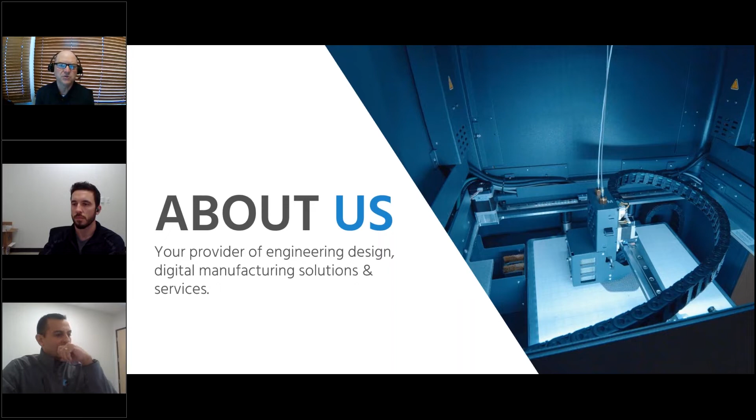For those of you attending a Hawk Ridge webinar for the very first time, I wanted to share a little bit about our organization. We were founded in 1996. We provide design, engineering, and digital manufacturing solution services—that's the primary focus of our business. As you can see here, we have an extensive product portfolio that covers four key categories: design, manage, simulate, and manufacture. Those are the four key areas companies typically go through as they develop a product and bring it through the product life cycle.

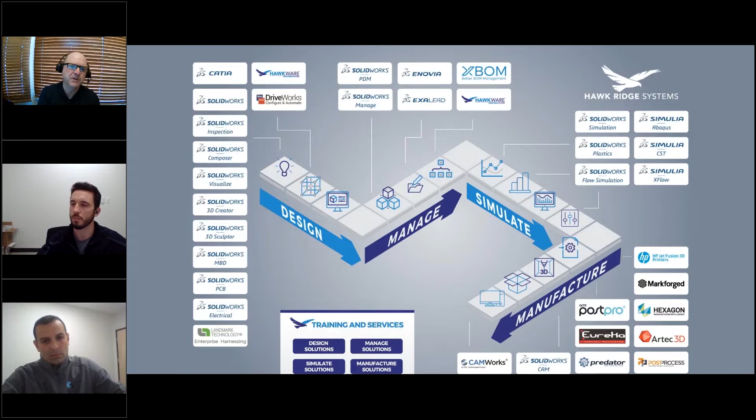Another key area I want to mention is the training services aspect of our business. We believe in supporting what we sell. Here at Hawk Ridge, we work with our customers to assure that they are successful all the way from pre-sales and identifying the best solutions for their specific need, as well as installing or implementing the total solution, and training and supporting them for many years to come. That gives you a brief overview of our product portfolio.

Amongst these offices, we have 7 different locations that have digital manufacturing labs, where we provide live demonstrations for various 3D printing equipment and post-processing equipment as well.

Hello everybody, thank you so much for the opportunity and for the interest in our company. To give you an idea of how we started, our company really realized that 3D printed parts essentially are not ready for use out of the printer — they're still unfinished when they're done. So to us, this presented a huge opportunity to break down a barrier that continues to prevent many of you from transitioning to production for additive manufacturing at scale, or in general, from allowing some of these 3D printed parts to be considered end-use products.

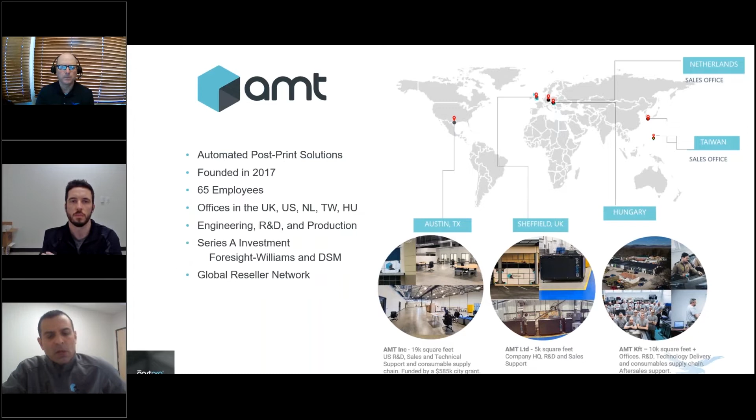With that, what I'd like to do is focus on the importance of post-processing, because many of you may be wondering what this is all about. If we can go to the next slide — I want to highlight that, depending on the application across multiple industries, the impact of post-processing on the ultimate cost of a 3D printed part can vary significantly.

I've been fortunate to be part of this industry since the very beginning, during my freshman year at Virginia Tech. My background is material science, and my experience with 3D printing started just researching materials and trying to understand the weaknesses of why they were being used only for prototyping. Why couldn't we use them as end-use parts? As the technologies improved and matured, I was able to be part of the transition from rapid prototyping to true additive manufacturing. As an industry started to qualify additive manufacturing for true production and scale it to production, what I've learned is that one of the most significant barriers to the transition to production is the cost of post-processing.

The cost of a 3D printed part comes from the preprint, which is the cost of software and the knowledge, know-how to prepare a build or design a part for 3D printing. Then you have the print, the material, and the post-processing. After you try to qualify an application for production and all the stars align on software, printer cost, throughput, material properties, and all the process settings and conditioning, so that you can have something robust and repeatable enough to go into production, you come to find out that there's still economies of scale that don't make sense. One of the reasons is because post-processing is so expensive.

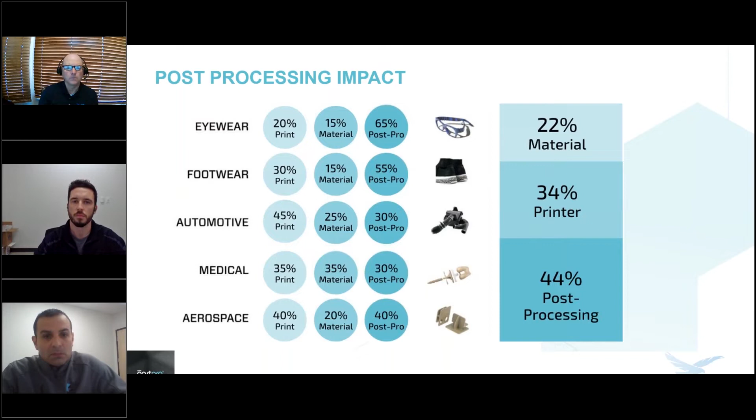I hope that as we move into describing all these products in the next slide, Brad and I will do a good job, and feel free to ask any questions from any of these industries - consumer, automotive, or any others. If you have a specific one, we've had a lot of experience looking at many of your applications. There's no agenda, but we're free to answer any questions. It's Brad - I'm not sure if you want to take it from here and walk us through the product line from AMT. Yeah, absolutely, thank you.

These are our products that we currently offer - chemical vapor smoothing, and also depowdering. As we approached the post-processing challenge and put together our plan of attack, we started with vapor smoothing first. This is the flagship machine we started with, the PostPro 3D, the machine on the right, the larger system there. That is our flagship machine that we've had out in the market for several years now.

The reason why we started here was, one, because of what Luis said - we built this off of a license from the university and brought it into an industrial setting. But we also saw the huge benefits of improving the aesthetics, the sealed surfaces, and improved mechanics, realizing that when we attack this, we can lower post-processing cost pretty significantly with this automated solution. Throughout the years of learning this system, we also realized we have the ability to scale this process up and or down. That gave us the PostPro 3D Mini, the smaller unit to the left, built around the exact same technology of using chemical vapor to smooth the surface of parts.

So how these actually work is we load your thermoplastic polymer parts, printed off of any kind of platform, into the system. What we do is introduce a chemical vapor onto the surface of your parts, and we ensure condensation and create a flow state on the very outside of that surface. So we're micro melting the surface of the part, creating that flow to remove the porosity, the layer lines, and that rough feel that you normally get, particularly off of powdered parts. You get that granular sand finish, or with FDM parts, you can get the coarse stepping and layer lines just from the technology itself. What we do with that flow state is remove all of those blemishes.

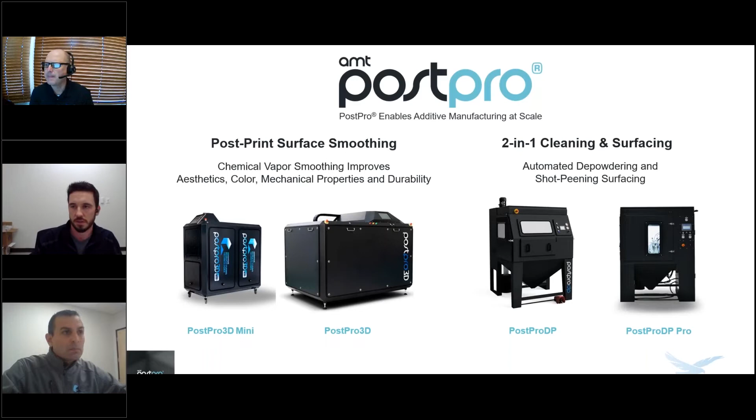Great, awesome. So these are the products. We can dive a little deeper into each of these if you wouldn't mind hitting the next slide.

When it comes to our Post Pro Vapor Smoothing, we separated it into three pillars we like to talk about. I'd like to start with the fact that we wanted to make sure this technology is easy to adopt—meaning we have a safe and affordable solution to allow users and industries to scale up with this process and their production, because now we've reduced post-processing time. Customers can now use this technology to hit higher volumes with better ability on the part. We also want to make sure we meet strict health, safety, and environmental standards so this technology can be located anywhere, even in the strict state of California.

It's also a near plug-and-play type of install. We wanted to make sure that when a new user brings this technology in as a true solution to automate their post-processing, they're up and running within the same day.

So there's various pieces of equipment involved, but it really is a plug and play solution. We do a training within a day, and we have our first run within a few hours to get that system going. So that's another big focus on it.

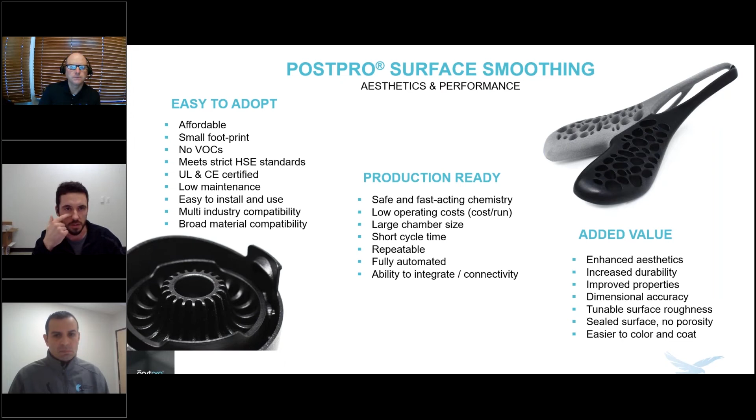So this here is color printed parts off the HP 580, as you can see. And the first thing you'll notice is the incredibly improved aesthetics of this part. And now the color actually pops, right?

The reason being, remember in the beginning when I was saying we create this flow state on the surface? The part on the left, the raw part, when it's being fused, the colored parts are surrounded by white powder, and this is the same with SLS or anything like that. There's always this partially fused layer of powder, and that's what we're focusing on. Once we liquefy that and start flowing that material, bringing our peaks down into our valleys and leveling out that surface, you turn it into what you see on the right - very smooth and sealed surface, bringing that partially fused powder into the surface.

And that's how we now reveal the true color of that 580's color capability, bringing you closer and closer to that color you desire, whether it's color coding or particular applications that need very color specific information on them. This was probably the most

eye-opening, literally, and dramatic effect that we've had with our customers when we show them the vapor smooth parts. I mean, we were the exact same way. We happen to have a customer of ours that has your technology, and I went to their facility and saw that, and I was absolutely blown away on how vivid the colors were that we were never able to get out of the HP 580 without going through this process.

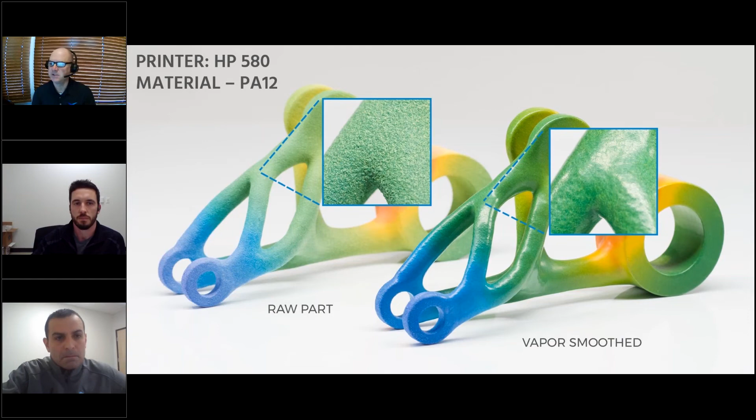Maybe we can move on and show some of those other images that we have, because some people definitely want to see some of the Onyx material as well.

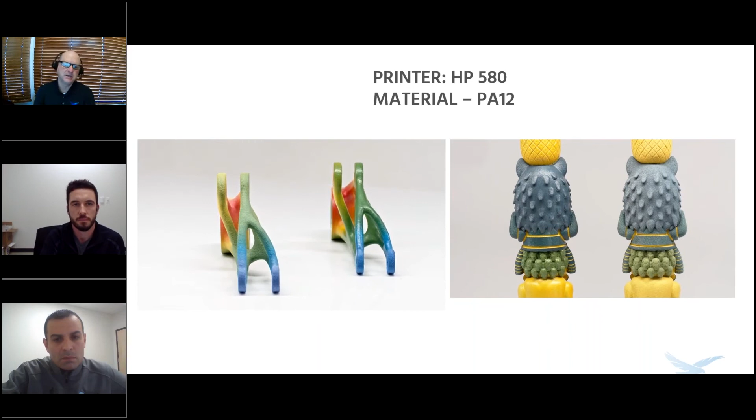I think this one's again pretty impactful, right? I mean, the same part that we saw earlier, but as we spin it around here, you can just see a significant change in the texture and the vividness of the color as well.

So I'll pass it back to you, Brad. Yeah, thank you. And just one good thing to point out is the part on the right there has a lot of intricate detail, parts coming to sharp points.

There's fine lines of color and all of that, and you can see that we still have the ability to control a great finish. The product on the right is that smooth sealed finish.

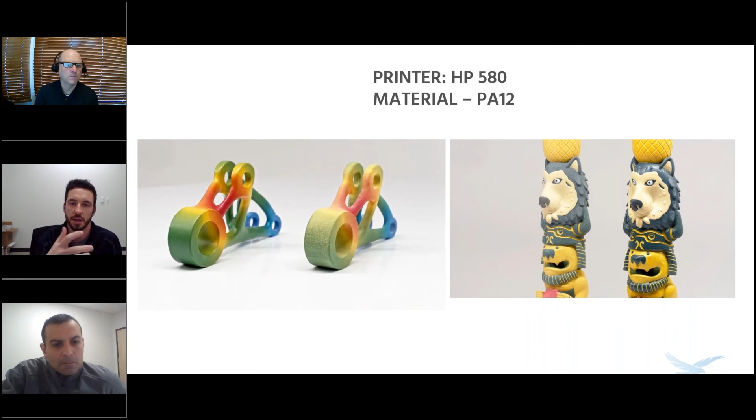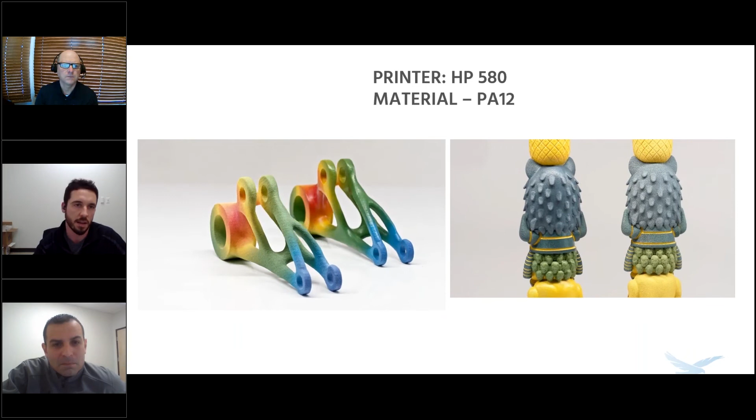This is actually a tap handle, and the benefit of vapor smoothing that surface is now that it's completely sealed, that can prevent bacterial growth. That surface can now be cleaned and sterilized. At the end of the day, I'm sure the bartenders are wiping those things down with all sorts of stuff, and being able to keep that material intact and cleanable, it's good for the next day.

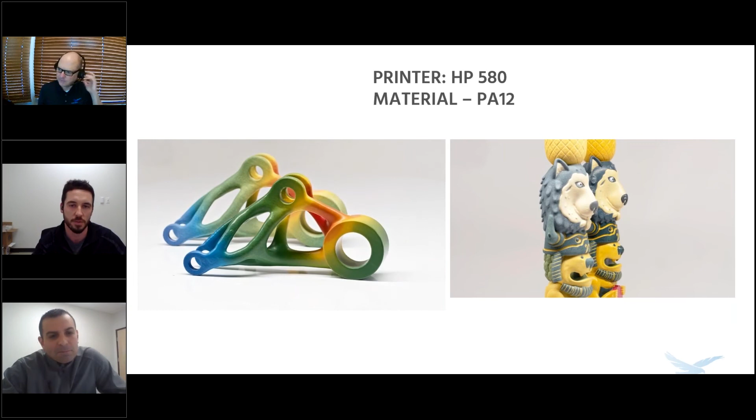Just to touch on the resistance, scratch resistance that Luis was mentioning, happy hour can get a little crazy, right? So there's a lot of movement on parts like that, so increasing its durability and everything is really a good focus of the technology.

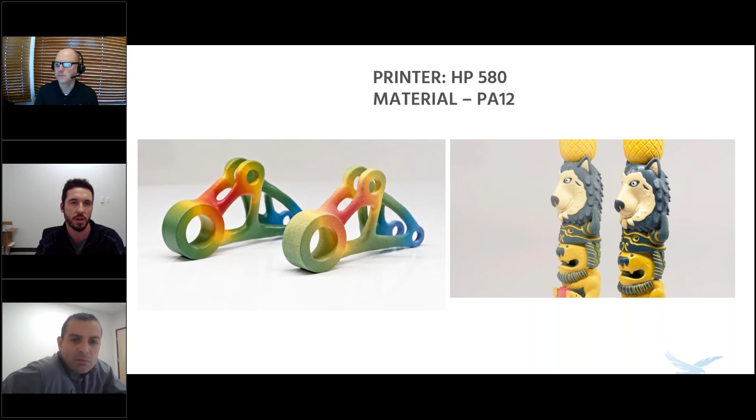Because of that, it allows us to go into environments that involve liquids, oils, gases, because this surface is now air and water tight. We've had many different applications that actually hold under pressure, things like manifolds and piping and pumps, and actually able to move liquids through the part under pressure without any kind of leak, which is fantastic. Now it's unlocking many different applications.

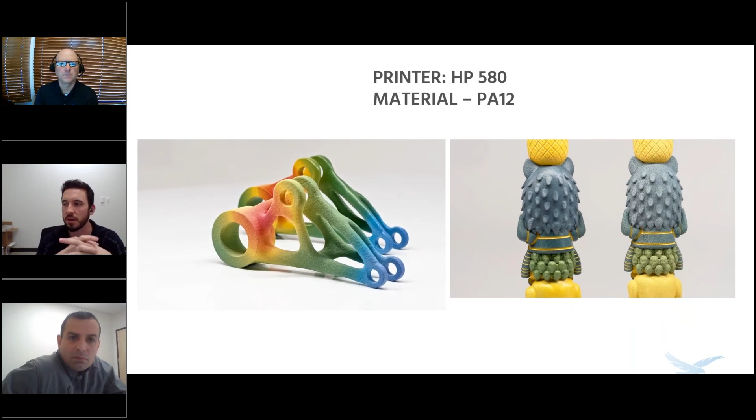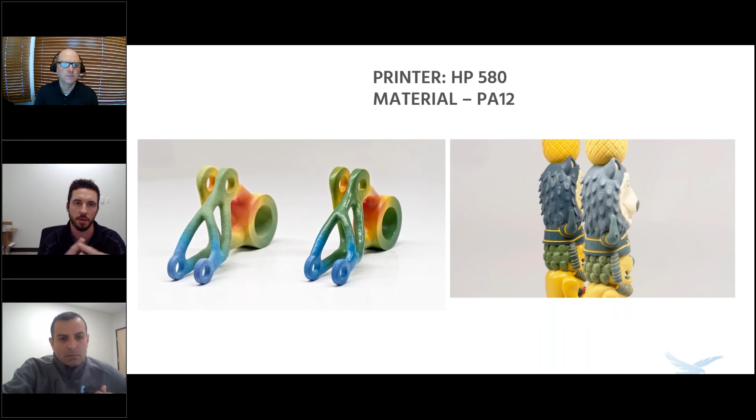One good thing is the medical environment. Because this is sealed and prevents bacterial growth, we can clean and sterilize that and be able to use it in different environments, especially with what's going on now and the spike of it last year with COVID and everything. So many different applications are coming out. We're able to utilize vapor smoothing so instead of these parts becoming one-time use, they can now be reusable.

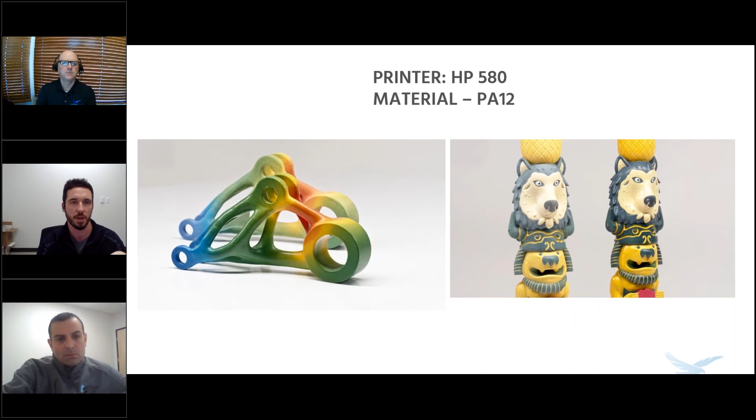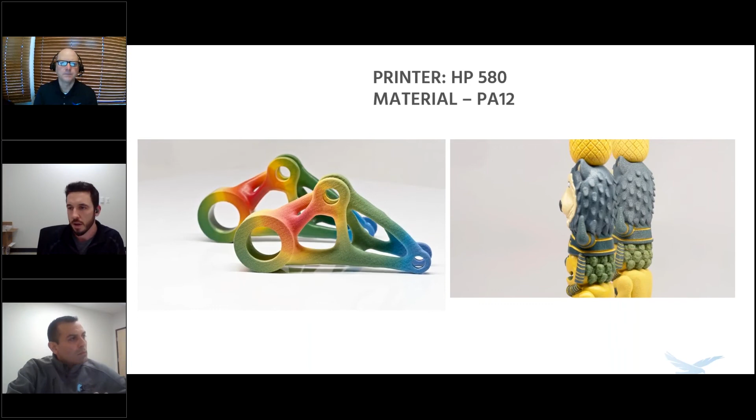And then we can go ahead through some of these slides here, just to get some eyes on filament parts. And Luis, you started talking more about properties, but if you want to dive any deeper on some other topics here.

Yeah, I think when it comes to the filament technologies, you can see that a lot of times, even if it's the same material, printed in the same model of printer by two different companies, you're going to get drastically different densities and different quality of the prints. What our technology is doing is essentially normalizing some of those differences by sealing these parts and getting rid of all the porosity on the surface, boosting the density of your part, and making a part that before was looking like a prototype now look like a finished part. But it also has better properties that are coming just from the fact that you had treated the part.

So, just to touch on the chemistry, it's a safe chemistry. It's medical grade alcohol that will not damage the parts. I think the worst thing you're going to find out about it is that it's an upper respiratory irritant, but that's where all the controls on the technology being a closed loop system come in, where the user or the operator never comes into contact with it. The parts at the end are guaranteed free of chemical. It's a chemistry that is being used in pharma to produce a lot of anesthetics. So it's something that is not flammable, none of the nasty chemistries out there. I just want to point that out because many of you, when you hear chemical vapor smoothing, may have the perception that it must be some harsh, nasty chemical. It couldn't be further from the truth.

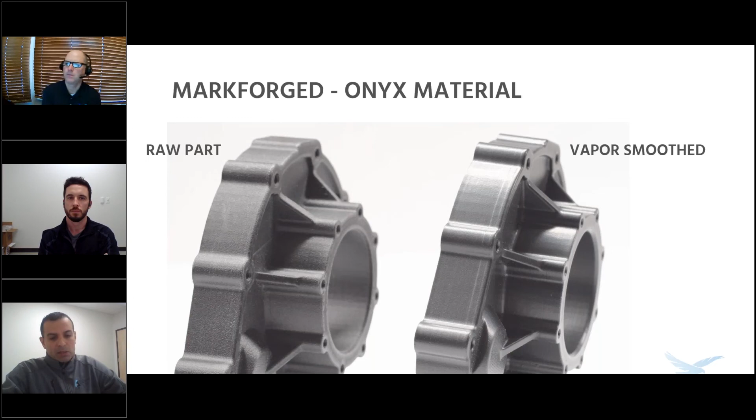That is the key component of our offering. So when it comes to the filament parts, it really does a phenomenal job at changing all those end of vector layering effects, and at times just getting a mirror injection molded image, like with the onyx material.

And like Brad said, when the material has any type of reinforcement, whether it's carbon fiber, we're only treating about a 50 to 100 micron outer layer in a very controlled way. So as soon as the chemistry touches those end of vector or the entire surface, it's going to start dissolving, and we start pulling and extracting. As soon as that happens, we start reclaiming the vapors, turning them back into liquid, and recycling them in a different container. But at the end of the process, by doing that extraction, we can guarantee that everything is coming out of the part, and your parts coming out of the machine do not have to be rinsed or treated in any other manner before they go into the end use.

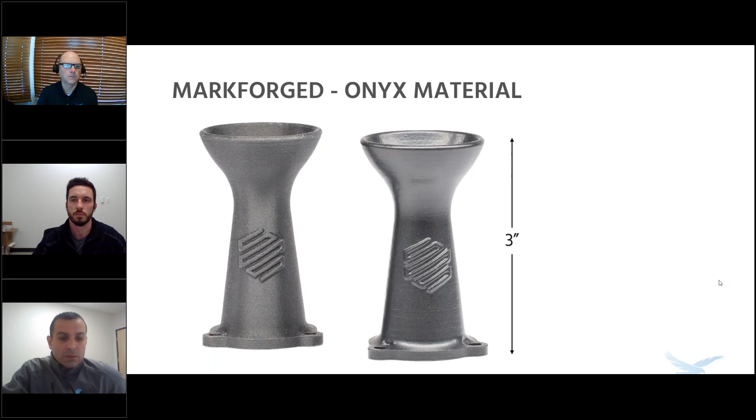There was a question about whether we have plans for PETG. Yes, we can still vapor smooth that very, very well, especially if we get some clear material. It looks really, really good, so we're able to smooth that as well.

I should point out, this technology isn't just limited to 3D printed parts. It can also treat parts coming from injection molding. It's been a phenomenal solution to erase surface imperfections coming out of parts that have been machined or milled via CNC, or that are injection molded and need to be clear and optically transparent, removing haze, removing scuffs from parting lines, and marks from ejection pins and runners from injection molding.

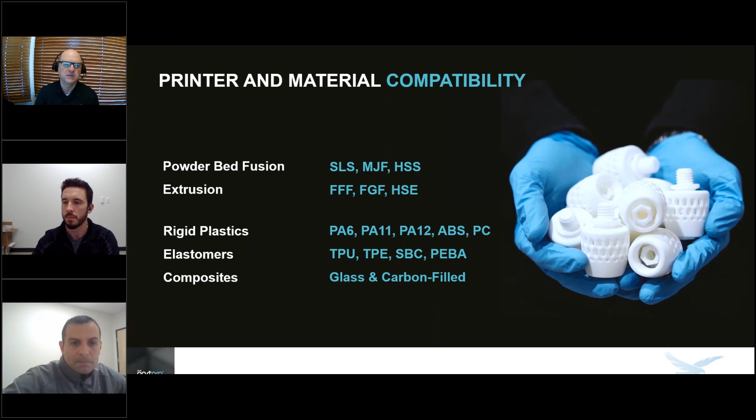Like Brad said, as a company we started with vapor smoothing technology. What we found is one of the single biggest variables comes from the process upstream, which is the cleaning, depowdering, or support removal of the part. That's why we wanted to introduce a technology that gets rid of that variability and does it consistently, repeatably, and affordably. We dive into depowdering technologies, which are all about reducing time and labor. I remember my days cleaning these parts, and they were not as consistent as on my bad days. This gets rid of user/operator variability and gets the part ready for Post-Pro 3D. The two combined is really a powerful tool for anybody trying to reduce costs and gain value.

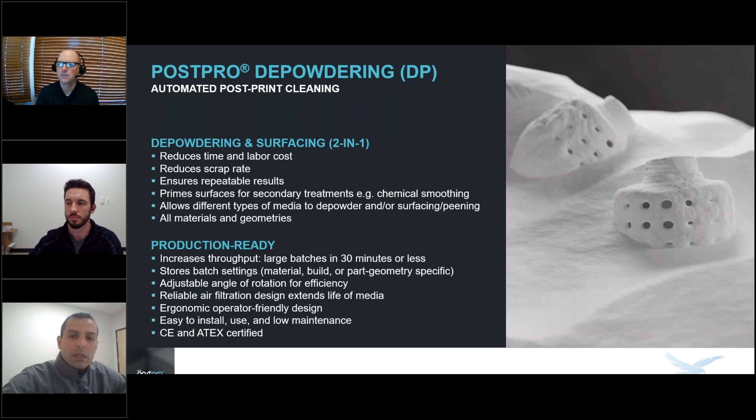Yes, I agree, we should have more in-depth applications.